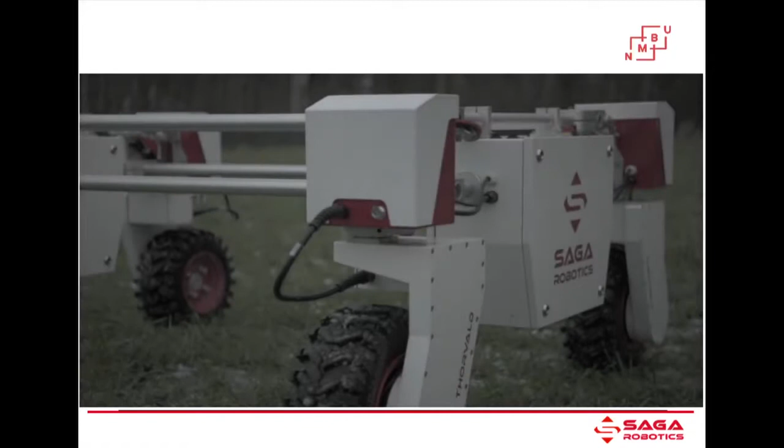So what we're doing in Norway is that we develop agricultural robots. It's a modular robot, so it can be used in a wide variety of areas and fields. The robots that we developed are currently being employed in open fields, in greenhouses, and in tunnels. All the robots are built and being developed in Norway. We have developed quite a few different types of robots over the years. Most of the activity has been going on for like 3 to 4 years now, so we've developed some of these robots that you can see here.

So I will say a little bit about how we work to get these robots out into the field, a little bit on the background of agricultural robotics and how we see this as a novel and interesting area. And I will also give some specific examples on what we work with and how we do that in Norway.

So the main problem that we all work with is, how can we produce more food and how can we do that better than we do it today? So the question is if this is the right way to produce the food that we do today. We're definitely very reliant on all of these large equipment that Simon Blackmore talked about earlier today, and that's also one of the reasons that we have this huge increase in production in the agricultural sectors. I don't think there's any sector that's comparable in size that can show for the same increase in productivity as agriculture. This is the reason that we can be as many people as we are in the world today, and that we can have the living standards that we have.

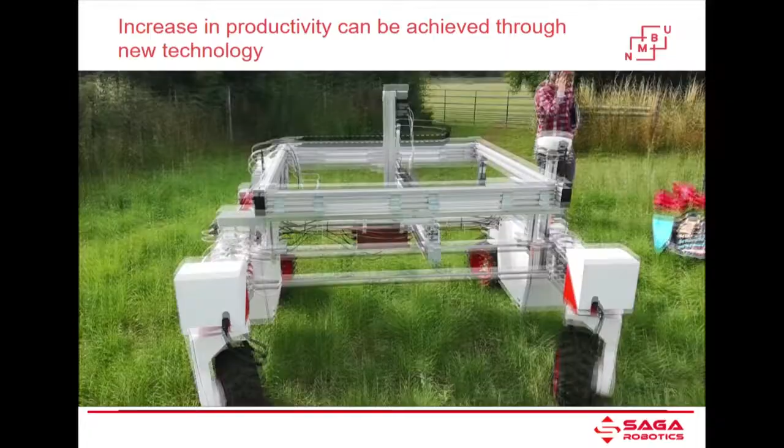This is an example of a 300 kilo measurement device for soil compaction. This is the phenotyping robot - in this case we measure the compaction in the field. So it's just sampling and looking into the quality of the soil, which also needs to be robotized if you want to do that in large areas, as we've already seen today. And quite a lot of tools.

This is a strawberry production robot, so I will talk more about that. We also have quite a lot of phenotyping, in-field transportation, and some of these systems I will go into in some more detail.

So we developed the robots. For us, the robot is just a thing with 4 wheels - the important thing is what you put on the robot, right? So we think of the robots as a tool carrier that we use to bring advanced technology into the field. I will give some examples of what we are doing there.

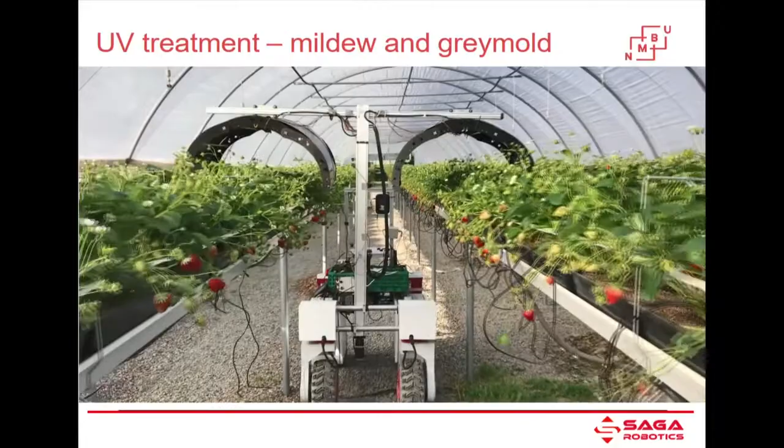For the first commercial products, we work with Saga Robotics, a startup company that spins out of the university, and we have some products that we've been working with already. The first one is related to strawberry production. In Norway last year, strawberry farmers lost 48% of all the yield to fungus - that's quite devastating for any farmer, as you can imagine. So we've been working with this autonomous robot.

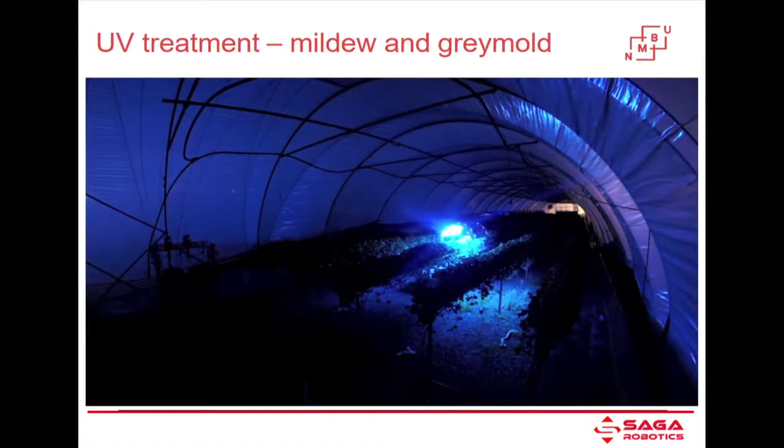The robot is completely autonomous. It works at night - the farmer just tells it when to start, and the robot drives up and down the rows. It applies a UV light to the strawberries, which has the effect that it completely eliminates all mildew on the strawberries. Mildew is one of the worst funguses that we have in Norway.

So we're actually able to help the farmer by applying new types of technology - taking this technology, which in fact has been known for a long time, and putting it on an autonomous robot, using it in the field so the farmer can produce nice, healthy strawberries without the use of chemicals. The farmer is also actually able to produce these strawberries because with the chemicals allowed in Norway today, the fungus is resistant to those chemicals, so there's basically no way you can deal with this by spraying.

We've done the same with cucumbers. We have cucumber farmers that heard about this project and wanted to test it as well. So we took the robot. The robot looks very different, but it's actually the same modules. It's the same robot that we use in the field, just with minor modifications.

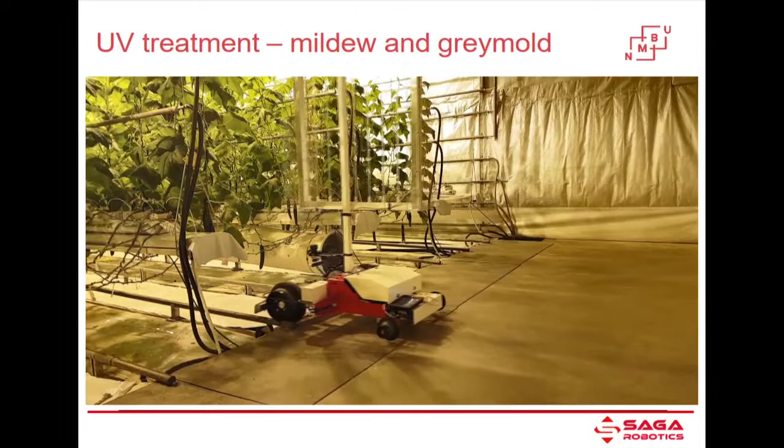So what we're testing out here is very low-cost sensors. The sensors on this robot cost about $500, and we try to use only these low-cost sensors to do all the navigation.

So what we do then is the main challenge is to find the rails. We need to get onto the rails, localize them, and make sure that we're actually spot on the rails. And then we move onto the rails, move down, and turn on the UV lights.

We do this 2 or 3 times every week at night, applying this light to the cucumber plants, and it works amazingly. We haven't had any outbreaks of mildew in this area yet. We're still early in the season, but it looks very, very promising.

So that's just one very simple example of how I believe robotics can be applied in the field. It's important that we use robots to facilitate the use of other advanced technologies and take that out into the field.

This is another project we've been working quite a lot with. It comes as a direct result of Brexit. We've been contacted by strawberry producers in the UK. They want us to do the strawberry harvesting. We've told them that, well, we can't harvest the strawberries for you—it's not realistic that we'll be able to make a system that can do that in 1 or 2 years.

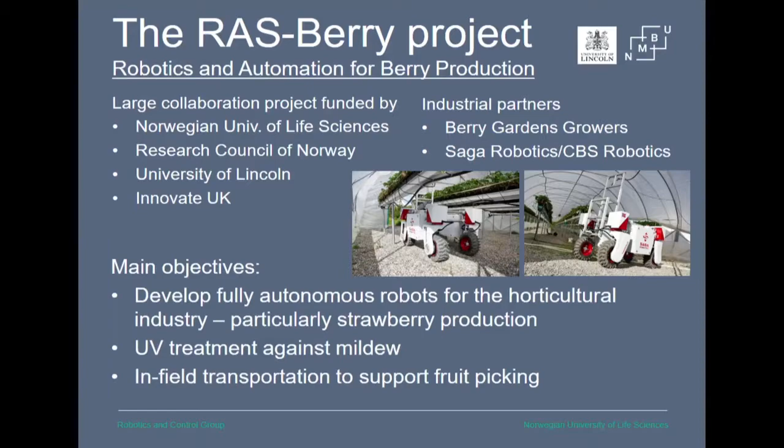So this is the project we have on berry production, on in-field transportation. It's a fairly large project. We have the University in Norway and the UK, funded on both the Norwegian and UK side. We have quite a lot of funding, quite a few people, but we try to put all of those people into solving relatively simple tasks.

So we don't want to solve very complicated tasks, just simple tasks that can help the farmer and help us get the robots out into the field. So we only work on 2 things: in-field transportation and UV treatment. I think by selecting 2 relatively simple tasks, it will help us get these robots out into the field.

So we had quite a few robots out there this year, and we'll have even more next year. I think we're getting close to 50 people working full-time on this project now, which means we'll get results quickly and get the robots out there fairly soon.

So until now we've focused much on making the robots, making a proper agricultural robot that can work in different areas. Right now we're working more on the autonomy and intelligence, making the robots robust and safe so that they can work for hours and hours without any kind of breakdowns, without any need for attention from us or the farmers. Then we're moving into other areas, like more into agronomy, with time.